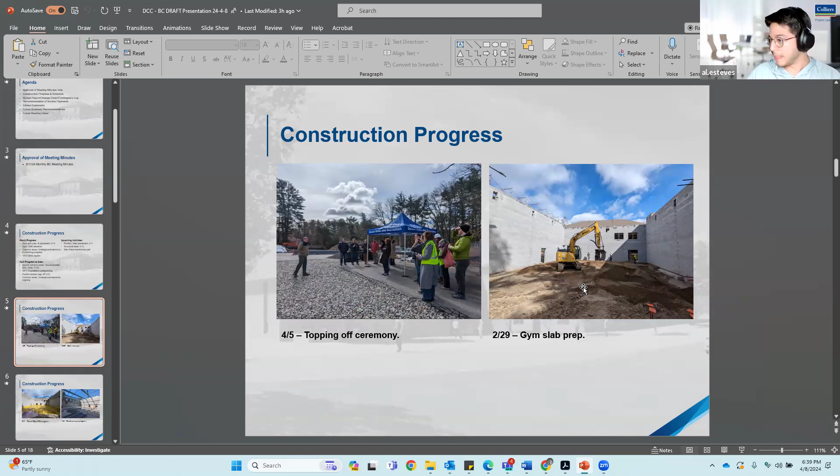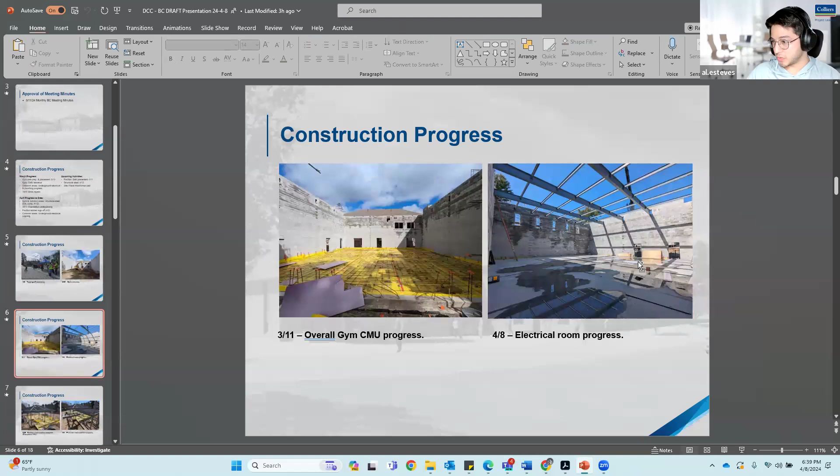So looking at the picture on the right, that's what the gym looked like at the beginning of the payment period, so the beginning of March. As you can see, they were just preparing for the slab on grade. By the 11th of March, we already had the vapor barrier, the rebar, and the dense grade installed. It was ready for concrete placement. And the picture on the right shows what it looks like essentially as of today. As you can see, all the structural steel has been installed at the gym building.

Moving on to the pavilion, as you can see, the difference between the beginning of the payment period and as of today. We installed the structural steel along the common areas between the pavilion and the other buildings.

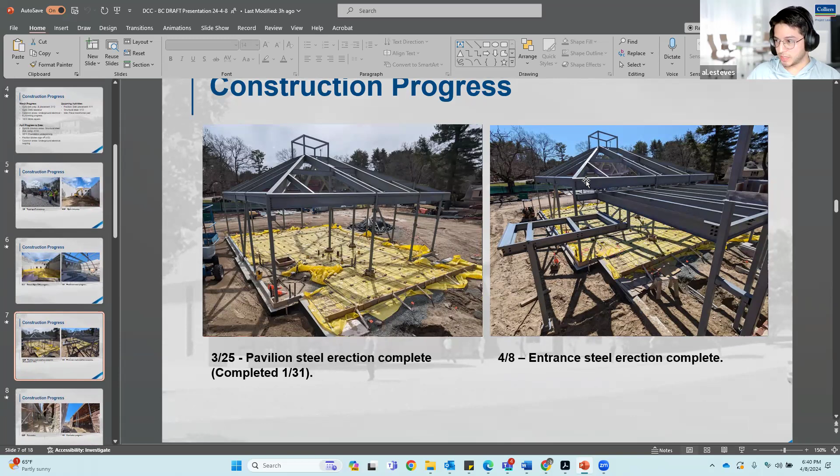Looking at that connector, the picture on the left shows the 1910 building on the right and the gym building on the left. So you can see at the beginning of the payment period, we just had the staging for the CMU. And the picture on the right shows what it looks like today. You can see some of the columns are already installed. On the bottom left corner, you can kind of make out some of the underground electrical as well as the plumbing that's ongoing.

So right now, the 1910 building is entirely shored up on the inside. That's because we had these openings here, and all these joists are essentially just sitting on the temporary shoring. So the next step is to get the steel beams on these openings, and then that'll open up the inside of the 1910 building to start some of the underground utilities and the basement, as well as framing inside on the second floor.

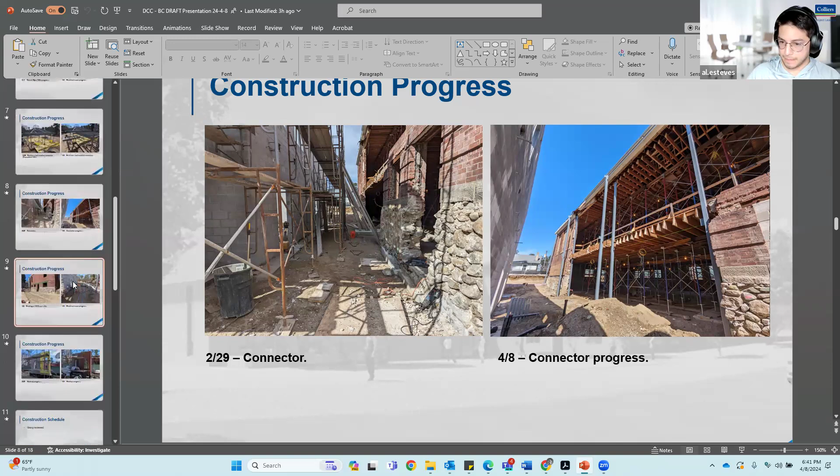Okay, the picture on the left shows the grading on the east side of the 1910 building. The underpinning along this side has been completed, and you can see some of the field stone foundation that's getting repointed. And the picture on the right shows the underground electrical work at the main electrical room.

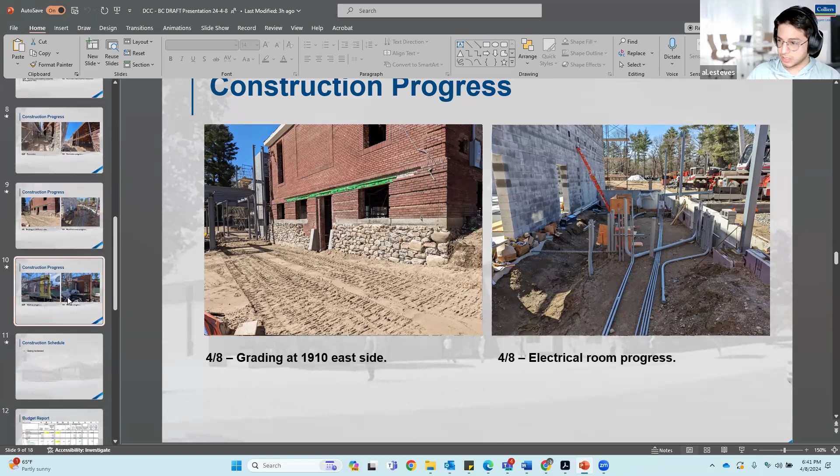And finally, we have the progress at the mock-up. The picture on the left shows the beginning of the payment period, and in the picture on the right, we're currently waiting on the sunshade to go up before we can complete the brick on the left side. So that's it for the pictures. Any questions on the pictures?

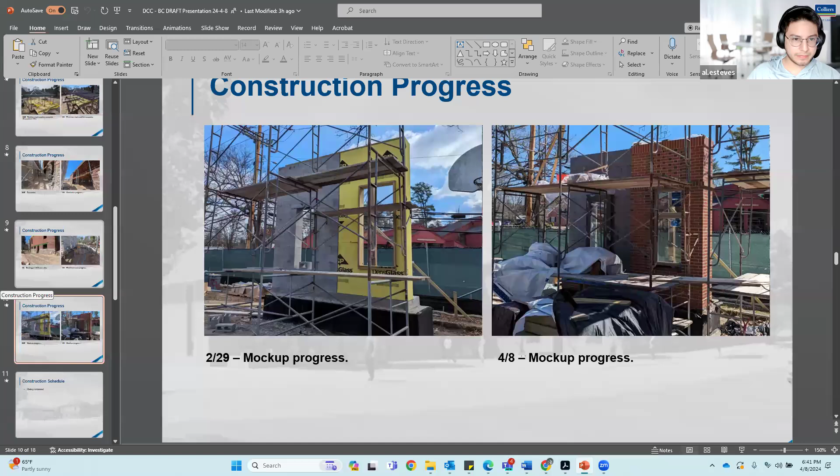Okay, like I mentioned, the construction schedule, we're currently looking at it right now. And going forward, I'll plan on having the milestones so that we can all see it and know where we stand on that.

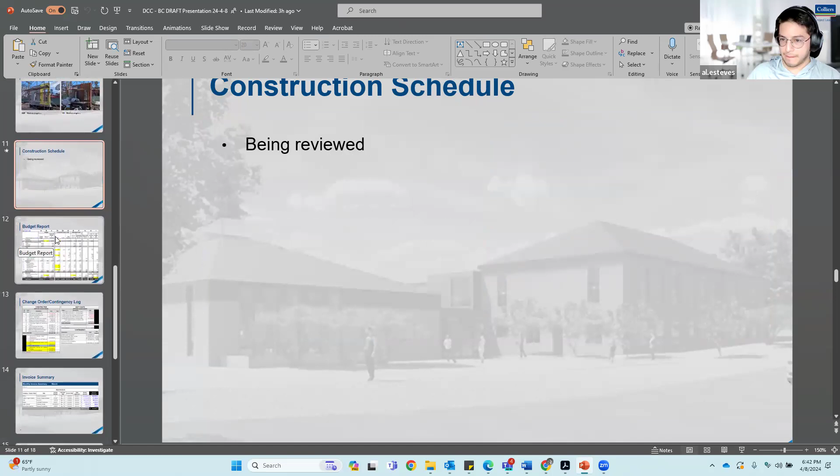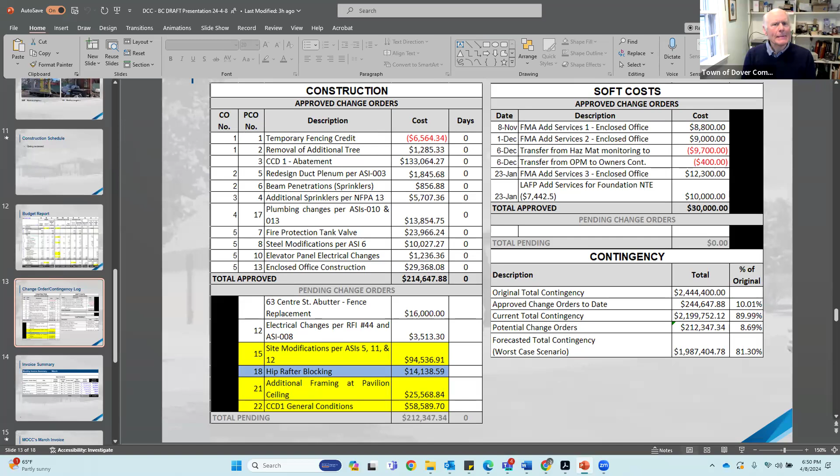Okay, moving on to the invoices for the March payment period. We have the contractor's pay app number 9. That is for $620,286.65. What that's for is general conditions, placement of the slab on grade for the gym, CMU labor and materials, brick materials. There's a bunch of brick materials on site, repointing of the 1910 building, submittals for the rough carpentry and elevators, underground plumbing, electrical distribution materials, and underground utility work.

We have our monthly invoice that doesn't change for 21,154. We have FMA's invoice for 28,272. We have Bricks, who's the third-party materials testing firm, for 2,559.50. We have a typical monthly invoice for the two containers for 398. And this time we also have another invoice from Roche Bros, and that's for the catering for the topping off ceremony, and that was 170.04.

The total of all the invoices is 672,840.21. I've reviewed all these invoices, and I feel that they're fair and reasonable and consistent with the contract terms, and I recommend that they be approved. What's the percent complete on construction? So schedule-wise, we're about 50%. As far as the invoicing, about 23%.